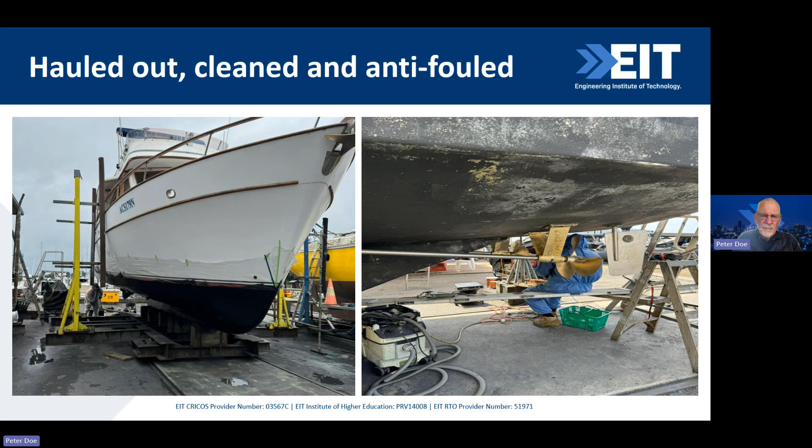So this is the boat. It was hauled out up on a slip, cleaned, anti-fouled, and I did all I could to make sure it was fit for the voyage home. Now I'll explain a bit more. I'll just jump here - the boat was located at a place called Batemans Bay, which is halfway between Sydney and Melbourne, near Canberra on the coast.

So the challenge is to get that boat from Batemans Bay down to Hobart. I'll explain that a little further. The original plan was - there's Batemans Bay. Can you see my cursor? Yes, we can see that.

To sail down the south coast of New South Wales and then straight across this body of water called Bass Strait. That's this stretch of water, about 100 nautical miles wide here. It's a notorious stretch of water, notorious because it's dangerous. It's shallow, only about 100 meters deep, and the winds come from the west, and the storms can be quite deadly.

In fact, in 1998 I think it was, there was a yacht race from Sydney to Hobart. Every year they have the Sydney Hobart yacht race, and 6 sailors died in that race. Only 115 yachts started, and only about 34 or 44 actually got to Hobart. The rest were damaged or sunk. It's a dangerous stretch of water.

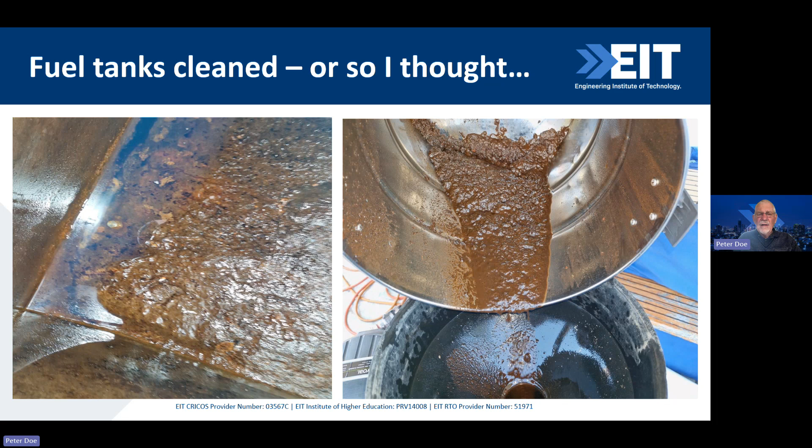I thought I'd had the fuel tanks cleaned, but you'll hear a bit more about that in a few minutes. So I did what I could to get the boat prepared, and I hired a professional crew.

These are people whose job is to deliver boats. It's interesting, when you hire a professional crew, you have the skipper, the deckhand, and the owner, and that's the order of command: the skipper, then the deckhand, and the owner has very little say in what happens after that.

So we set off from Batemans Bay. The plan was to go to Eden, which is quite a big port. Big cruise ships come in there, and we'd stay there until we got a weather window.

This is some software called Windy, windy.com. It's free at a certain level, and you can get a professional version too. It shows you the wind and how it develops, forecasting for the next week.

So on the left-hand side, this is what we had planned: to go to Eden and wait until the weather improved, then go straight down to Hobart. That would have taken about 48 hours, I think, from memory. I'll come back to the actual figures later.

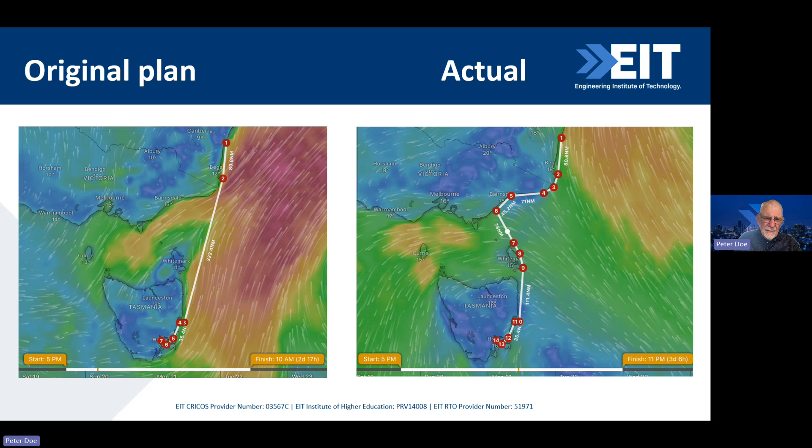So we set off for Eden. We got to Eden after 13 hours at sea, entered Eden Harbour at night, and anchored in a very nice little bay at the south end of Eden Harbour.

Everything was fine except that the skipper didn't like the look of the oil in the starboard engine, on the right-hand side of the boat. As I said, there are two engines, similar, both 120 horsepower diesels, but the oil looked a bit milky, and that was a worry.

And we were losing coolant. We kept checking the level of the coolant, and it was disappearing, which is a bit of a problem.

So what happened at Eden was that when we motored across to the other side of the bay, to the port, to get some parts that we needed, suddenly the temperature in that engine increased above 180 degrees to nearly boiling point of the coolant, and a lot of steam started blowing out the exhaust.

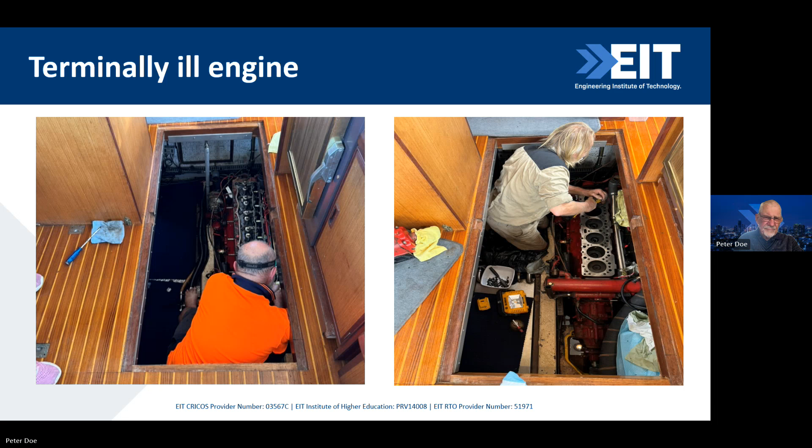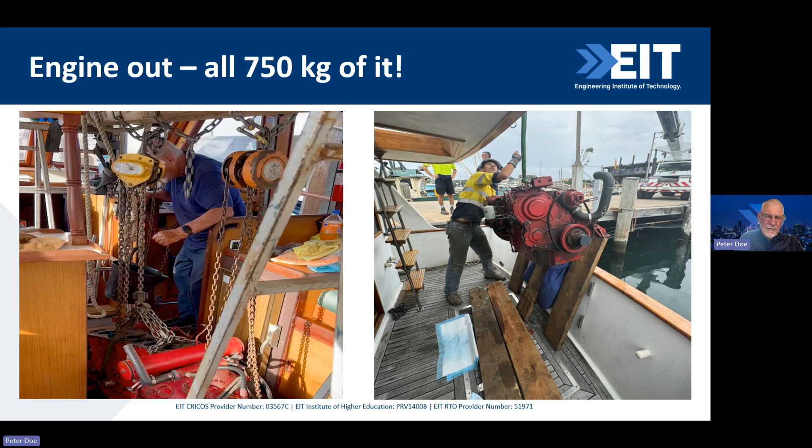We had to take out an engine which weighed 750 kilograms, by lifting it up out of the bottom of the boat with a strong bar at the top and these frames, lifting it up, putting boards under it, moving it 30 centimetres, putting it down, moving the frames. It took us all day to get the engine out. And there it was.

That was what the engine looked like with the crane out the back of the boat. We're at Bermagui. I said it's a nice place to be stranded, but I didn't want to be stranded. I wanted to get that boat back home.

But at that time, when we discovered that the engine was terminally ill, there was a fault in the block, I didn't really know, I didn't have a plan B. It was only because one of my friends saw an advertisement in one of the local magazines, someone trying to sell a similar engine, that I found this fellow called Mick, from a place called Cowra in the middle of New South Wales.

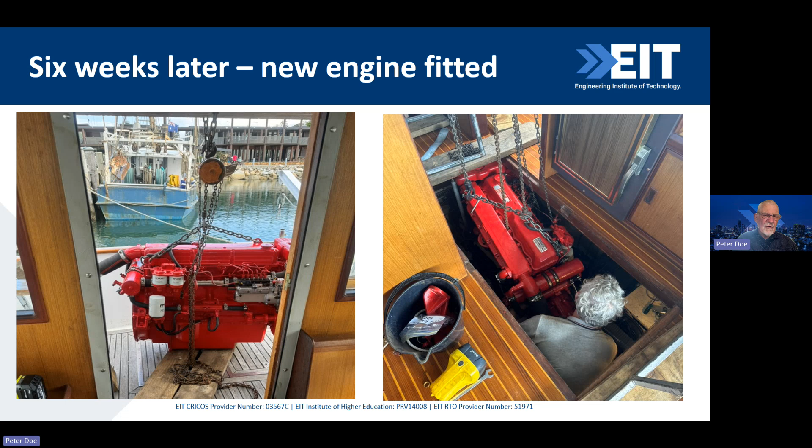What he did, his job, his hobby really, was going around finding bits of these engines in old boats and repairing them. So 6 weeks later, a new engine arrived. It was bits of my old engine, but new bits, and obviously a new block, all put together and nice and painted red, and we reversed the process and lowered that back down into the bottom of the boat, so we were good to go again.

Of course, the engine had to be run in, being a new engine with new pistons, new cylinders and so on. So the first 9 hours, I ran it in according to the instructions. You have 1 hour at 1,000 revs, or this sort of thing. And the last 6 hours had to be done, so I thought, okay, let's do this.

So we were in a position at that stage with a new engine, a new crew. I got another new crew to come. We had a good weather window. We departed Batemans Bay on the 6th of May. Remember, I bought the boat at the end of January, and on the 6th of May we were ready to go again. We had smooth motoring.

We bypassed Eden, where we got to before. We went into Bass Strait, this dangerous stretch of water, and we got about 20 nautical miles in, and then, disaster. I was down below having a sleep. What we do on these long voyages is what we call watches, 3-hour watches. I'll be on watch for 3 hours running the boat, the skipper for 3 hours, the deckhand for 3 hours. That's how we organise it. So the engine just started going slower and slower, and then stopped.

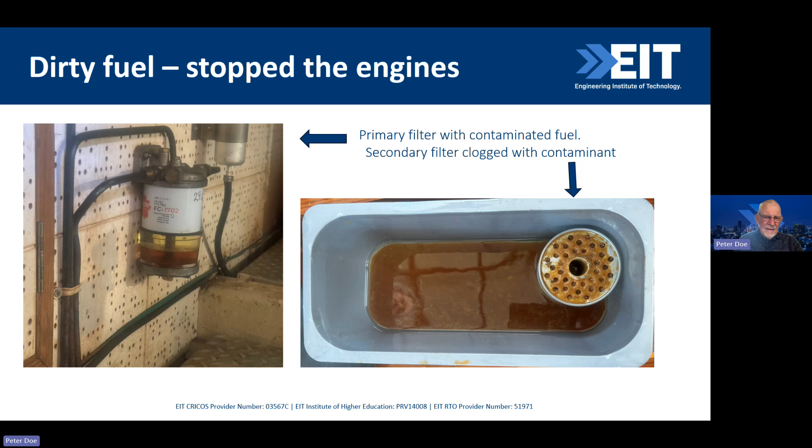That was rather disappointing, to say the least. But even worse, because the contaminant, the muck, had got into the engines, the starboard engine, the new engine, was blowing a lot of smoke and was clearly very sick. So we had 2 problems: another sick engine, and we wanted to know what to do about the dirty fuel.

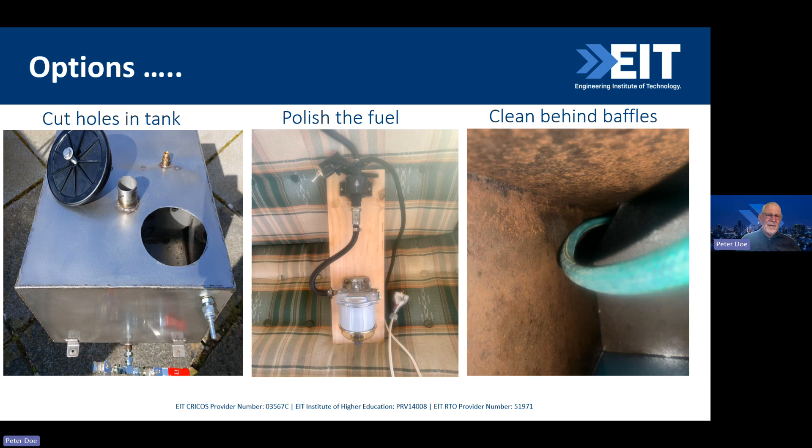All right, so next we had to have the engines repaired. My friend Mick came down from Cowra and put in new injectors, and we got the engines all going again nicely. So on the 27th of June...

These dolphins come along and there's a pressure wave in front of the bow, and they surf it, having a lovely time. We enjoyed their company. So we got into Lake's Entrance, which is halfway along the Victorian coast, and that was coming in to Lake's Entrance.

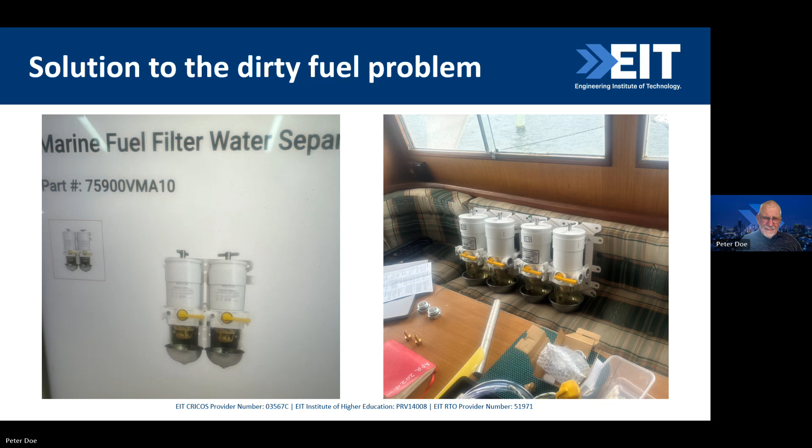So I fitted these filters and we set out again. We waited for a weather window, looking at this - it's windy, I won't play that video, but it gives you an idea. You can look ahead about 7 days. So we headed out across the bar with my new crew.

Just to explain, on the east coast of Australia there are a lot of these ports associated with river systems, and they all have a bar. These bars can be quite treacherous, but we decided to go - you can see the water breaking across the entrance to the bar at Lakes Entrance. We followed a fishing boat out through here, and the fishing boat radioed back saying to be careful, indicating there was a bit of danger. I thought to myself, well, we're certainly going to be careful.

We came up to the bar, and ahead of us there was a breaking wave which I estimate was about 4 to 5 meters tall. I was confident in the boat, so we headed into it at reduced speed. We went up the wave, through the breaker, and down the other side - not a problem. The boat is a beautiful sea boat, so that was okay. We were very happy about that.

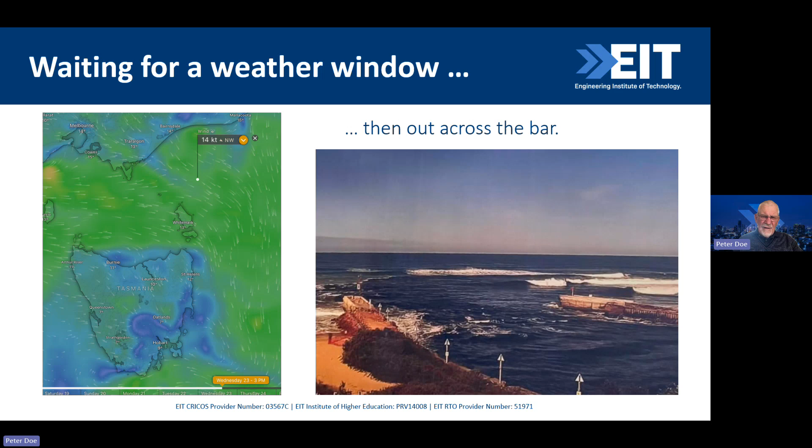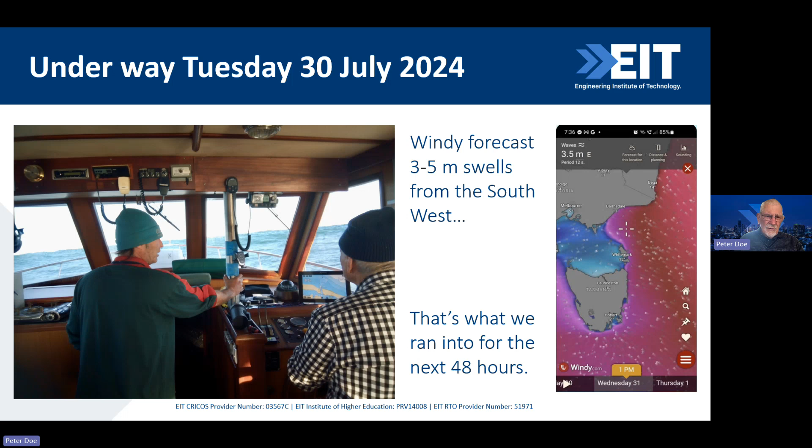We got underway on the 30th of July. There wasn't a lot of wind, but there were 3 to 5 meter swells from the southwest, on our port quarter. That's what we ran into for the next 48 hours, and this gives you a bit of an idea what it was like.

We headed along the Victorian coast for 3 or 4 hours, then turned south to head across Bass Strait at nightfall. When you're at sea in a boat, it's completely dark - you can't see the waves, but if you look at the sky you see stars disappearing, which means there's a big wave heading your way.

We motored through that, and the following morning we found ourselves partway through the crossing. We had radar on board and were able to see big ships crossing our bow, and could alter course to go behind them. That was one real benefit of having good navigational equipment, which I fitted to the boat when I bought her.

A chart plotter - you can see it here. This was rolling down the east of Flinders Island, so a bit more roly-poly stuff.

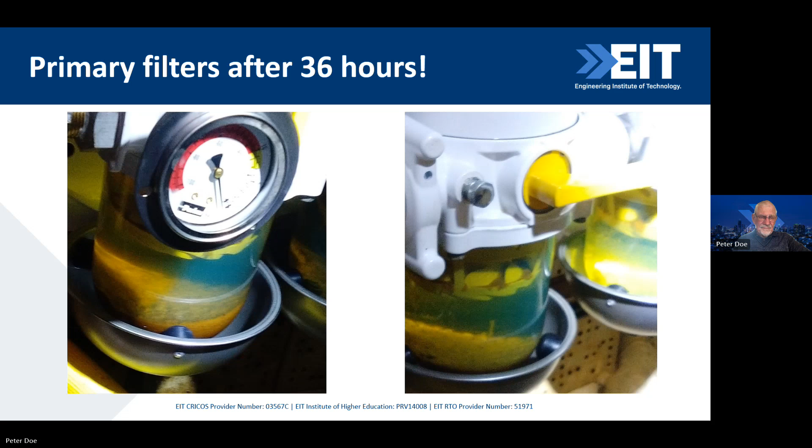Passing through Schouten Passage, we were pretty much in sheltered water, with Tasmania to the right of us. We passed down inside a place called Maria Island, and got through what are known as the Narrows, an entrance to a shortcut across the bottom of Tasmania.

We made it through the Narrows and tied up at Dunalley Jetty - you can check these places. We had a little bit of trouble getting through the Narrows because we thought we knew where the channel was, but it had moved, so we ran aground a couple of times. Luckily it was sandy, so we managed to get through okay.

From Lakes Entrance to Marion Narrows was 336 nautical miles in just on 48 hours, at a 7-knot average. We're quite pleased about that.

So the following morning we go through the canal. I'll just show you a little bit of this - this is going through a canal, swing bridge.

We were following another boat, which made life rather simple, safely through the canal.